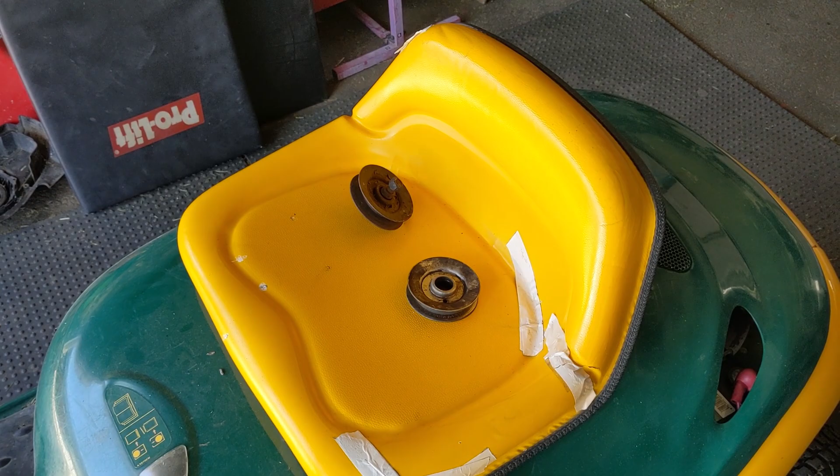So today in the shop we are working on a Yardman Beetle. These things are pretty cool, and I just wanted to get this on video because I have never worked on one before. It came into the shop today for a rear drive idler pulley, and I ended up having a used one that we're going to install and try to get this thing operational again. Not a big repair today, but I basically just wanted to do a little overview of these things, because like the Craftsman Utility Vehicle we worked on many years ago and ended up selling to my neighbor, these things are pretty unique.

So like I said, this is a Yardman made by MTD, and the particular name of this is a Beetle. However, when you run the model number to get the owner's manual or the parts diagram, it also is referred to as a Yard Bug. So two different names, I guess, for the same piece of equipment. This thing is pretty cool.

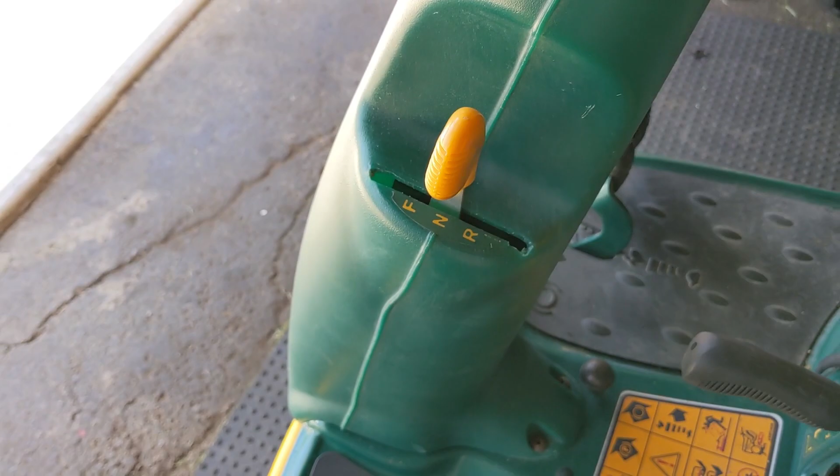You sit on top of the engine. The engine's back here, similar to the Craftsman Utility Vehicle. It has, I believe, a 27-inch deck, engaged via this foot pedal. You can see the blade, and you raise or lower the deck using that. It is a hydrostatic drive, so it has forward, reverse, and a neutral option, and the speed control or throttle pedal is over there. And then that is your brake pedal. So quite a bit of levers going on here.

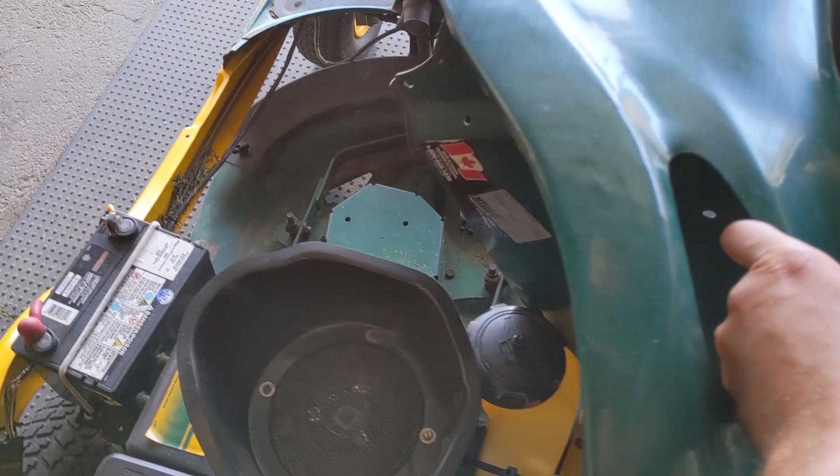But the cool thing about this is just the way that it looks and how they cover it up, making it look like some kind of little beetle or bug. Now at the back of the mower here, to get access to the engine, you just grab a hold of this and the whole thing just kind of lifts up and out of the way, and then you have access to the engine.

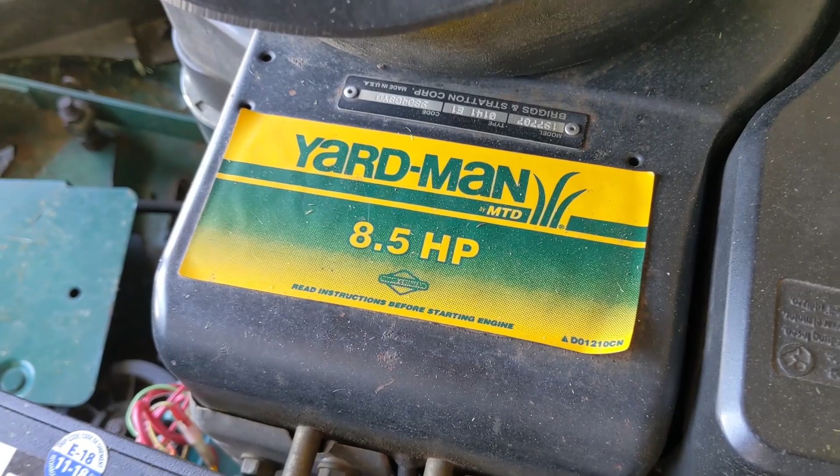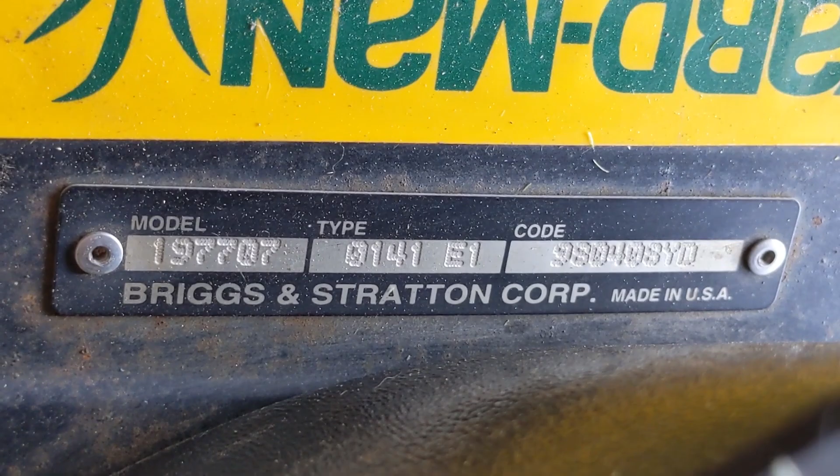It has a Briggs & Stratton 8.5 horsepower, although when I looked at the owner's manual for this, it said 9 horsepower, 27-inch. The model number of the engine is 197707-0141-E1. So it basically appears to be your standard Briggs L-head engine. It doesn't have overhead valves or anything like that.

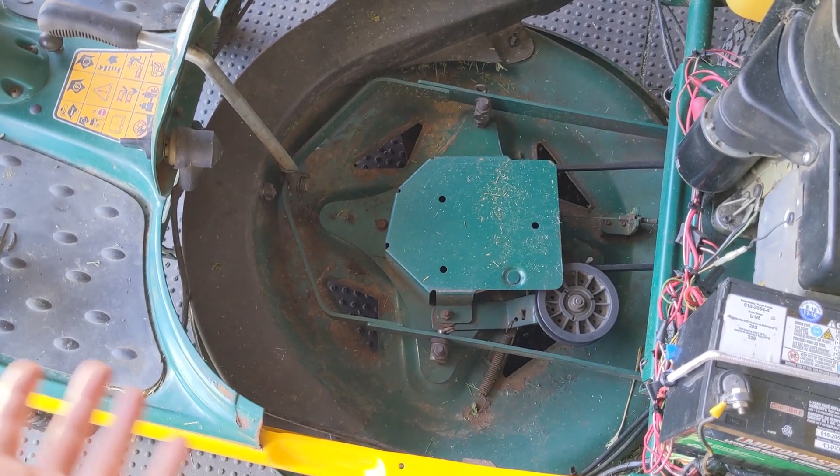You got a little battery box here. I can see my customer has just a bungee cord holding that on. And then here is the mower deck, that's normally where the internal bagger goes. So this has a bag that catches all the grass that goes in here, so this is what's referred to as an internal bagger unit.

However, my customer just has it set up for side discharge right now. He says that's the way he likes to cut. But it is a very cool unit, how they have this outer frame going around it, and this big open section in the middle there. Cool unit, and I wanted to film it.

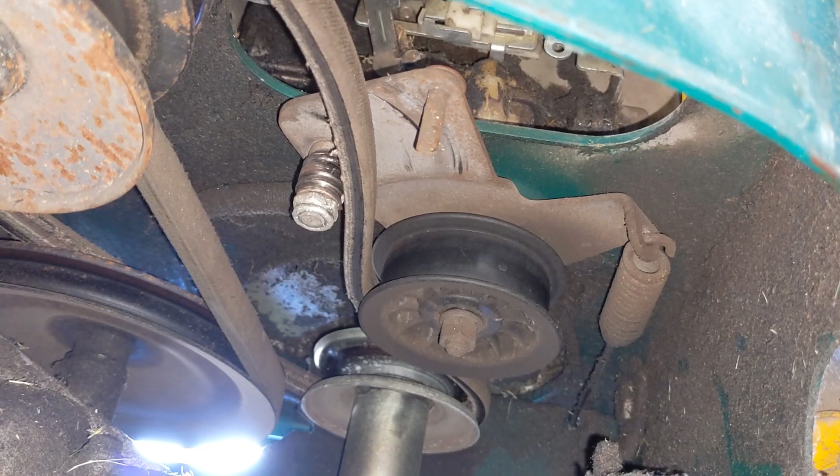Now the reason it came into the shop today, like I said, the idler pulley needs to be replaced. So the bearing on this one seized, I'm assuming to the bolt, and the pulley, he said, just completely fell off. And the belt, you guys can see, is showing some signs of wear.

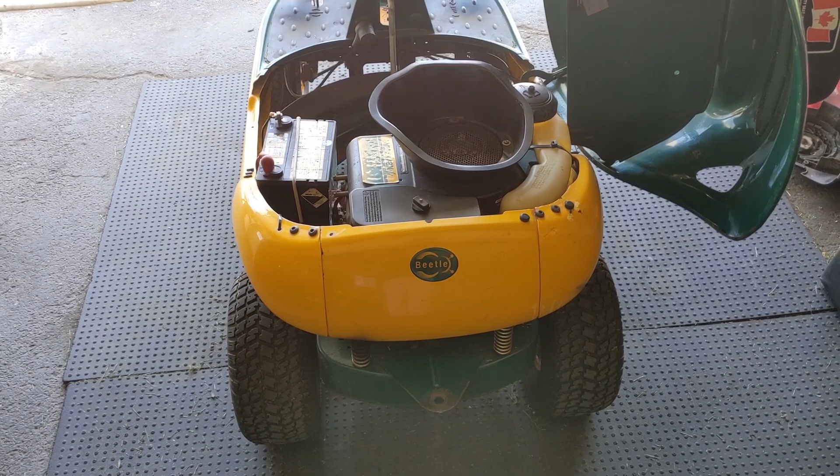So in order to save my customer a little bit of money, I won't be replacing that belt at this time. Now, I was able to find an illustrated parts listing for this machine just by going to Google and typing in the model number, which is down here under the seat. So that's going to be a 13A-320-501. And that sticker is starting to peel off, so I could imagine that if someone else had this unit, that's why I'm including these numbers, just so you guys can pull up a parts listing for the machine itself, as well as the engine if you wanted to.

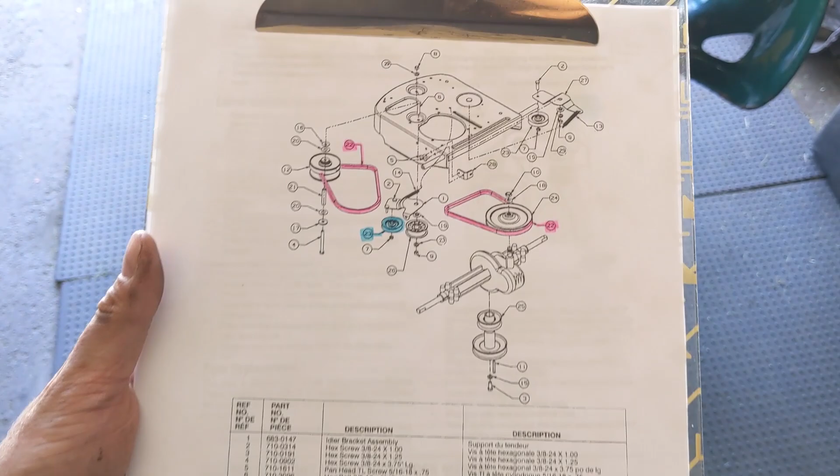And the machine's parts listing is going to look something like this. So we're down here at the drive diagram. You guys can see that in blue, I have the V-belt idler, so it's not going to be the flat pulley that we're looking at. And then in pink, which is really cool on this unit, both belts are the same part number. And that's going to be a recurring trend with MTD products.

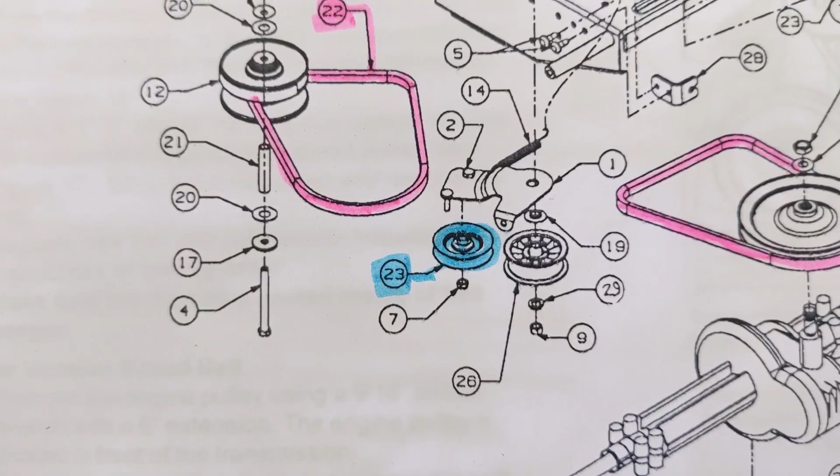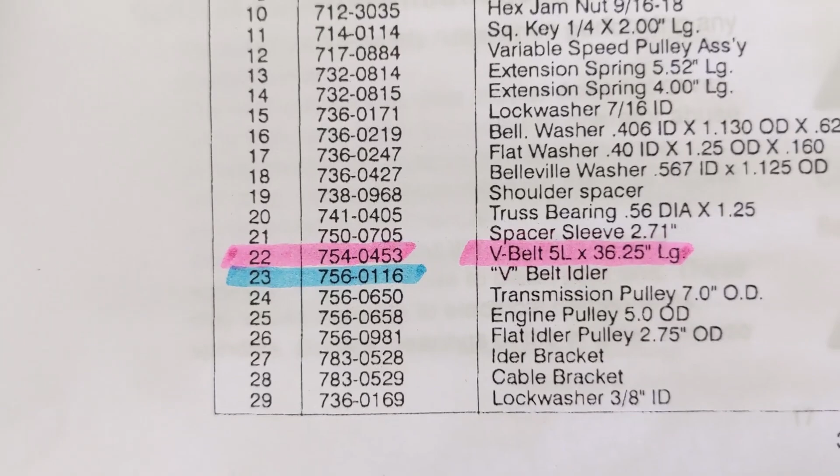You can see here number 23 is the V-belt idler pulley, and over here is also the same pulley. So they like to use a lot of these parts multiple times on the same machine, and also the same part on different machines too. So it cuts down on manufacturing costs and makes it easier for me. So coming down here to the part numbers themselves, number 23, again, the V-belt idler is going to be a 756-0116.

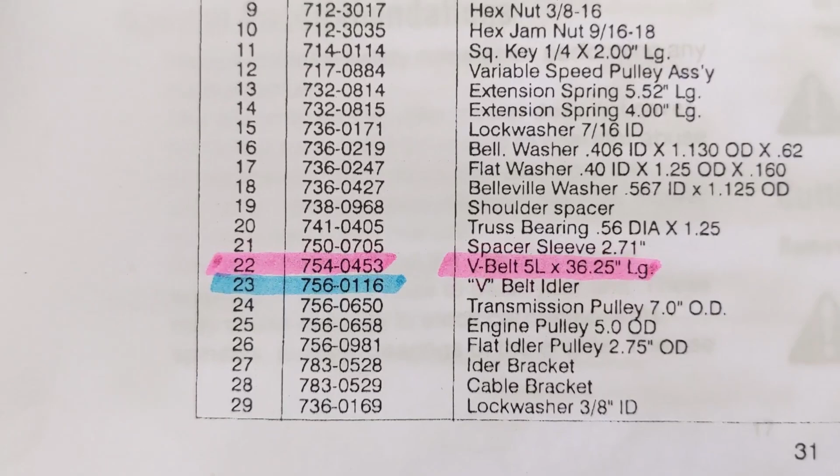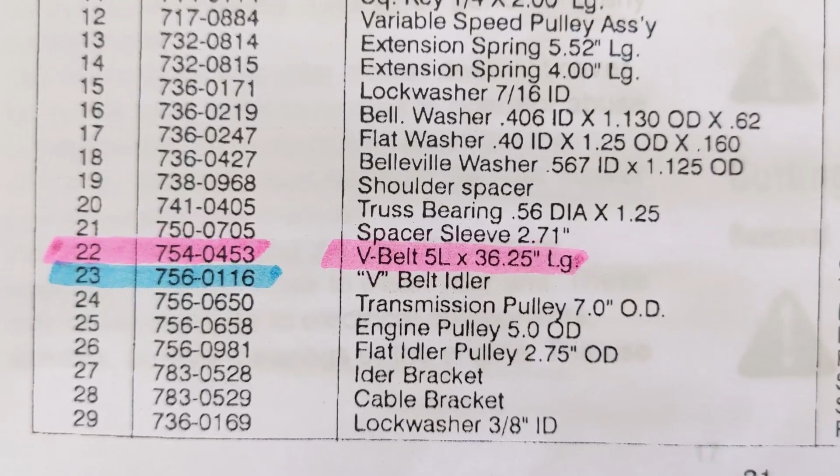It's probably superseded to a 956 because that's how MTD likes to do things now with all the modern parts. If you're looking for the belt, it's number 22 on this listing. That part number is 754-0453, which it lists as a 5L by 36.25.

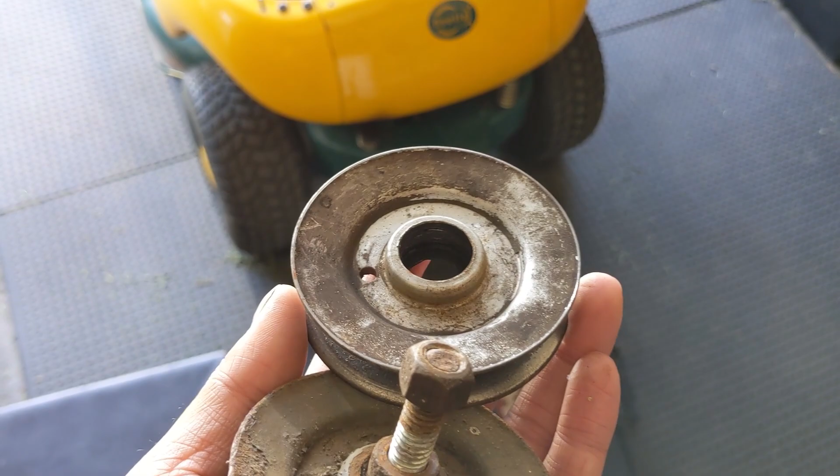So it's 36.25 inches long, and 5L is 5/8, and that is a V-belt. My customer said he was just driving and cutting grass, and he noticed he lost all drive on this unit. So he stopped and looked, and saw this pulley laying there. He looked up underneath and saw that this thing just came off.

I'm assuming the bearing seized up and this thing just wore out. Now, as I said, I won't be replacing the belt. However, I would never replace a belt and run a new belt with a used pulley. But just to get this guy going, I was able to find a used pulley that is identical in my parts storage bin. So we'll be using a used pulley with his used belt.

What I'll do is get a new pulley and a new drive belt on order just so I can have them in stock. Then, in the event the belt or pulley fails, I can have those parts in my inventory and replace them, or whenever he brings it back in for service, maybe next year or the year after, we can replace those parts at that time.

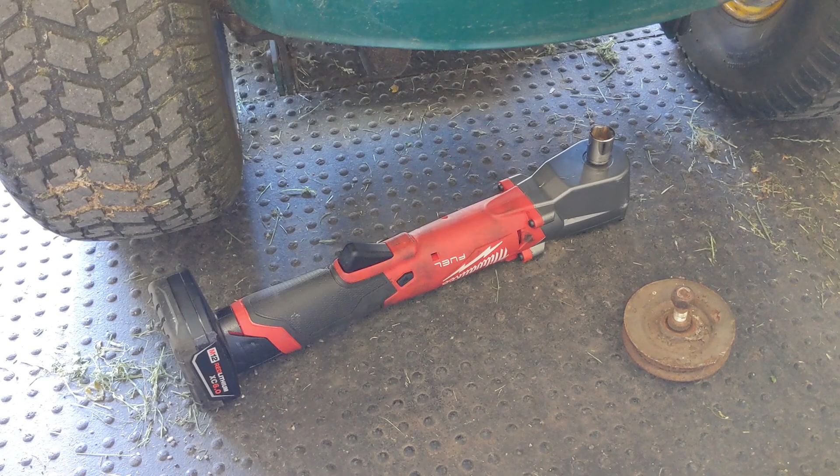Now, to remove the seized bearing from the idler arm itself, we are using my new Milwaukee 90-degree impact with a 9/16 socket. This is a 3/8 drive, and I ended up putting a 6 amp hour battery on it. It's an M12, so that works with all my other M12 batteries, but if you want to max out the potential of these tools, you definitely want to run the biggest M12 battery they make, which I'm pretty sure is the 6 amp hour. It's part of the Milwaukee Fuel series, and it is a brushless motor.

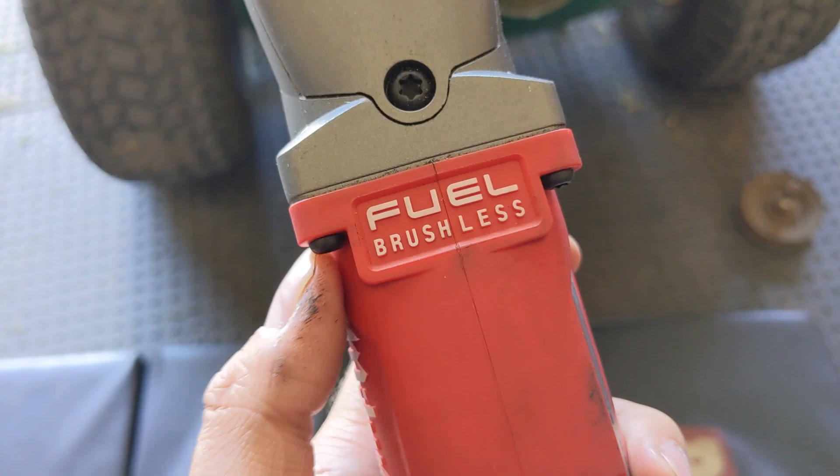The cool thing is it has 4 different speeds, so you get slow, medium, and fast, for either removal or installation. It also has a cool 4th mode, a removal mode, which is basically an auto-sensing mode. When removing a nut or bolt, it gives you maximum breakaway torque, which I believe is 220 foot-pounds for this particular model. Then it auto senses when that nut becomes loose and slows down the speed of the tool so the nut doesn't completely fly off your hardware. That's pretty cool, and I've been using this thing every day now and absolutely love it.

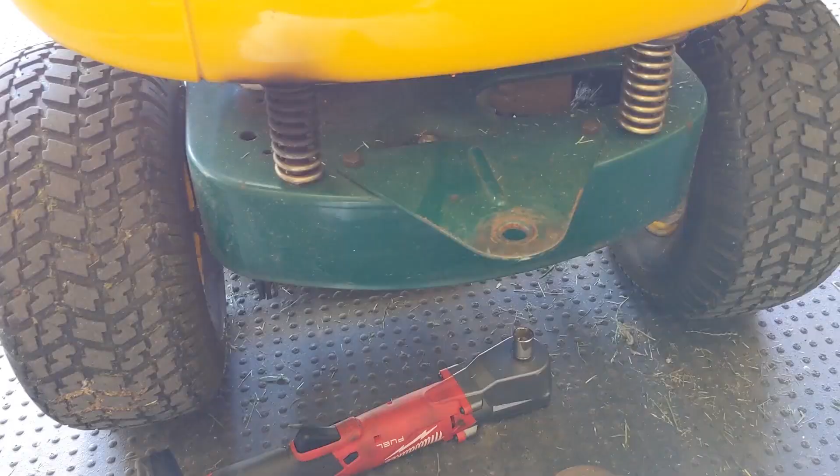To get at that top bolt, MTD is pretty good at giving you a little cutout, so you can move this idler bracket to the side, put a wrench or socket on it, and loosen it off there. Looking from the underside, I can see the engagement cable and spring, as well as the return spring, are still attached and functional, because when I manually manipulate this plate, you can see the return spring returning as it should. So this, in theory, should just be a replacement pulley, and this thing is back up and running again.

Apart from that, everything else is spinning freely, including the flat idler, which is the black plastic one there. And the belts don't seem all that bad. We can see that the lower belt here looks like it's in excellent condition.

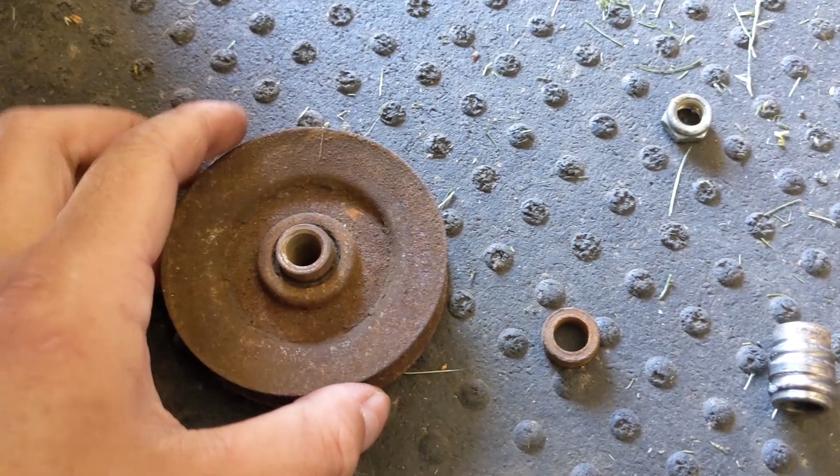Now, because I am using used parts, this pulley here, when I removed the bolt, had this part up here that's fixed, and on the other side you can see it didn't have a piece that came out, so instead it just had this little bushing, I guess you could call it. However, on the one we removed, all it had on the inner race of the bearing was this part here, so I'm assuming that's just going to be like that. That part poked out and the bottom side didn't have anything. So I'm just going to be installing this just like that.

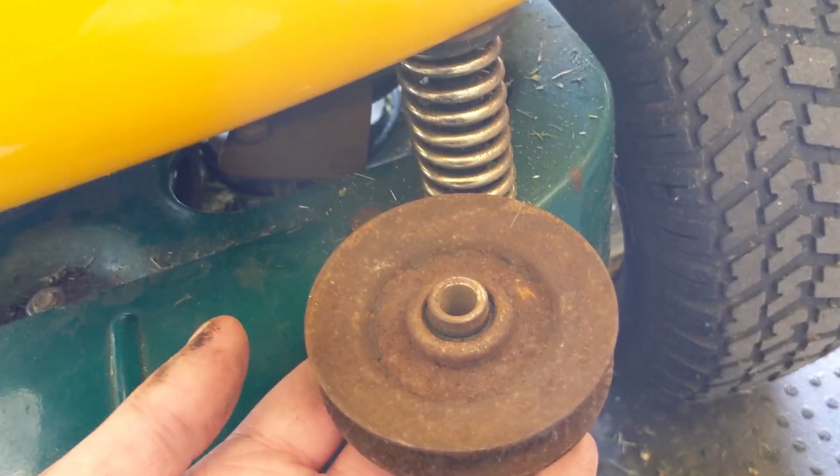What I'm doing here is manually moving the idler pulley back so that I can have access at the bolt through this cutout.

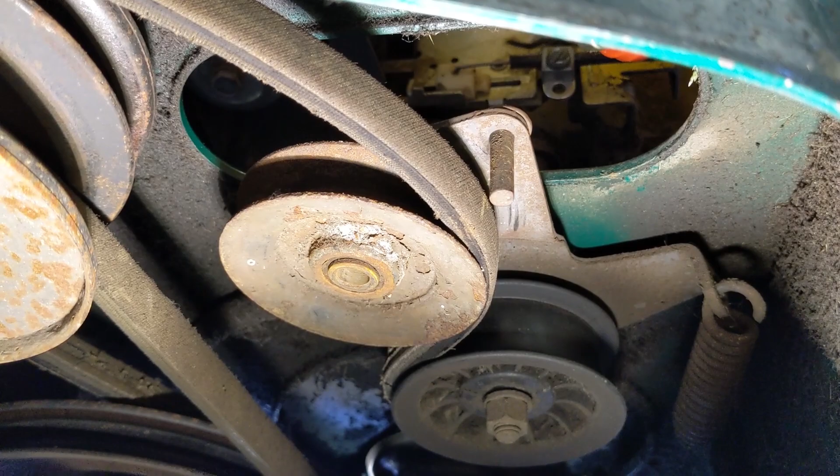Lift the bolt up, slide the pulley in, and get your belt into the groove of the pulley, then slowly push the bolt down so it starts to engage in the pulley, and we can tighten the nut up.

The cool thing about the 4th mode is that if you're installing something, it uses the same auto-sensing technology to sense when the bolt or fastener starts to get tight, and it'll cut back the torque. That's really good for just installing things and getting them tight. Obviously there are certain nuts and bolts you don't want to crank down with 220 foot-pounds of torque, so using that fourth mode to install them is nice.

Normally though, what I like to do is put this into one, tighten stuff up, put it into two, and just give it a quick hit, and then they're pretty much tight and they'll never come off.

Quick enough repair for this, but my customer said he wanted a little bit of TLC on it, so I got the air filter cover off there. I'll replace the air filter, spark plug, and use the Pela oil extractor to go into the dipstick and drain out some oil so I can do a quick oil change on that. Instead of going to the underside and using the drain plug, I'm finding that I use the Pela more and more every single day. It's a really good tool. If you want to check out the video I did on that, you can click in the top right of your screen. But I'll take this thing for a spin once I get it serviced.

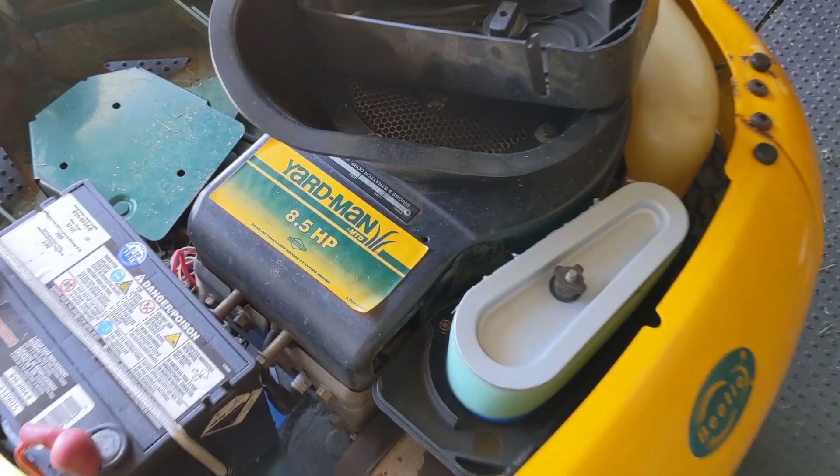It really is nice having boxes upon boxes of Stens air filters in my shop, because I can just go over to a piece of equipment, see what the model number of the engine is. Like I said, I get all my part numbers based off of that engine model number. Install a brand new air filter, simple as that. I can get this machine out the door today.

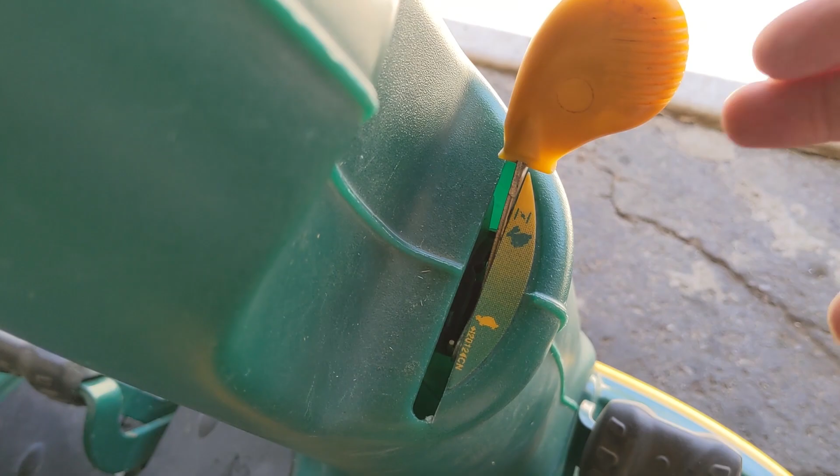Now, my customer did say that this unit ran. So on the right of the steering, you have this choke and throttle lever here, and then down here is the key switch. You would just turn that and the engine should turn over.

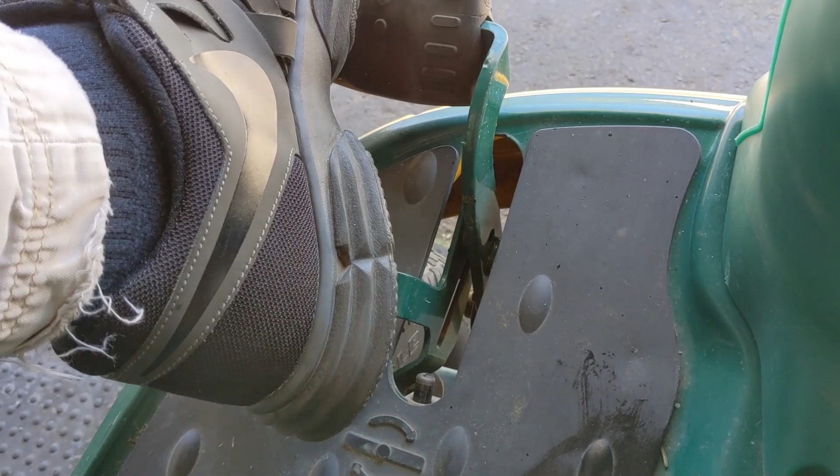Again, here is the blade engage. When you push that down, you want to put your heel down to lock that into place. And when you want to disengage the blades, you just press on that. That's a pretty cool system. Again, brake switch here, and then hydrostatic drive speed control pedal there. So foot on the brake.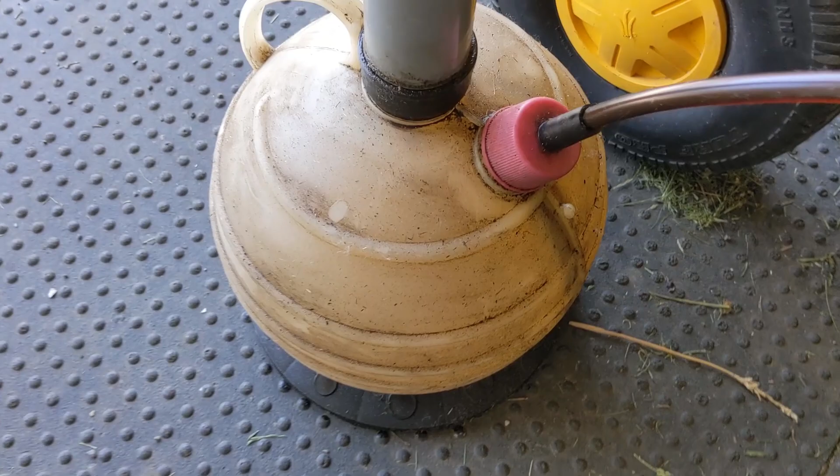So with the oil hot, it's draining out easier. Like I said, I'm just going over this thing. Mower deck belt looks to be in excellent condition.

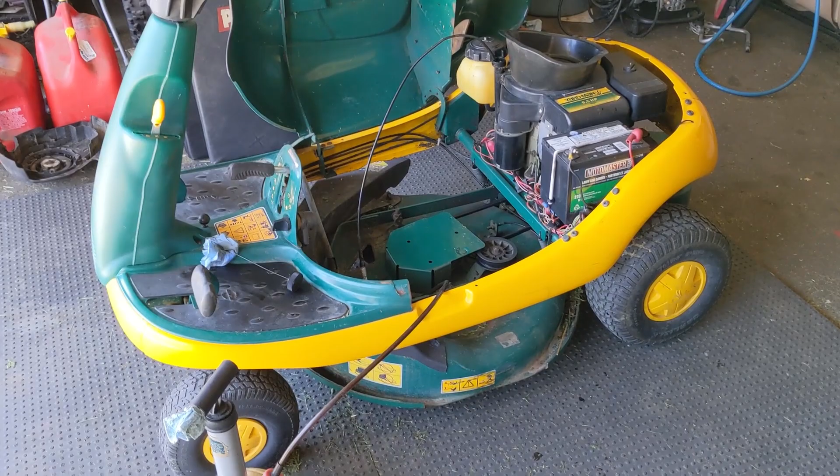Like I said, this is a pretty simple repair today, guys. I'll get this customer back up and operational again so we can get his grass cut. I'll get some belts and that pulley on order so that the next time it comes in for service, I'll just swap out that belt and pulley for brand new parts. So just a nice relaxing day here at the shop. We're not too overly booked, and when you get repairs like this, I got the time to pull out the camera and film some interesting stuff.

I'll be using some 10W40 Castrol GTX. This stuff was on sale. I've been using 10W40 in a lot of riding lawnmower engines, especially the Kawasakis and the Kohlers, but also on the Briggs & Strattons now. I find that a 40 weight oil, which is your hot end, doesn't burn as much. So if you have an oil consumption issue where maybe your valve guides are a bit worn, you get a little smoke at startup on some of these older machines, a little bit of thicker oil will help slow that consumption, but it'll never fix the engine. It helps extend engine life for some of these older engines.

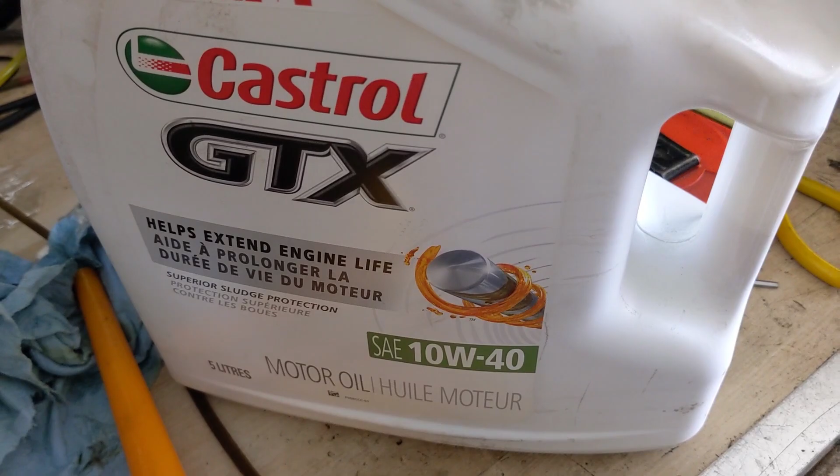That's going to be it for today's video, but I wanted to film this because there's not too many videos on these things. They are pretty unique, and I guess rare if you want to call it that, because I certainly have never worked on one before, so I definitely wanted to get this one on video.